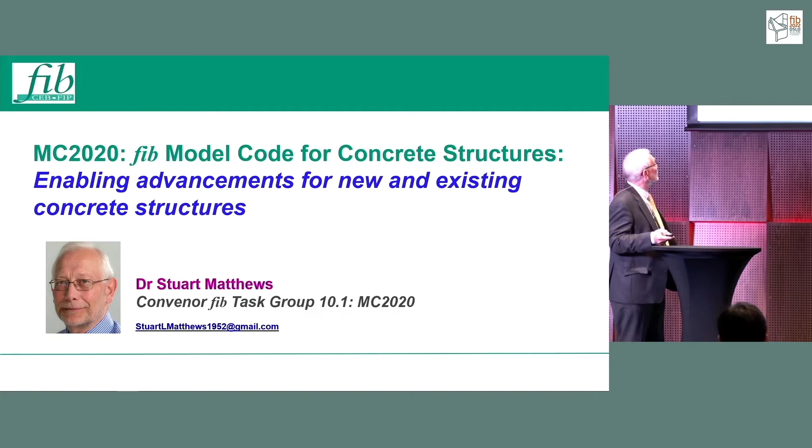That didn't work. Yeah, I'm pressing that button.

Anyway, so today's about providing an overview of some aspects, not all aspects, of the Model Code.

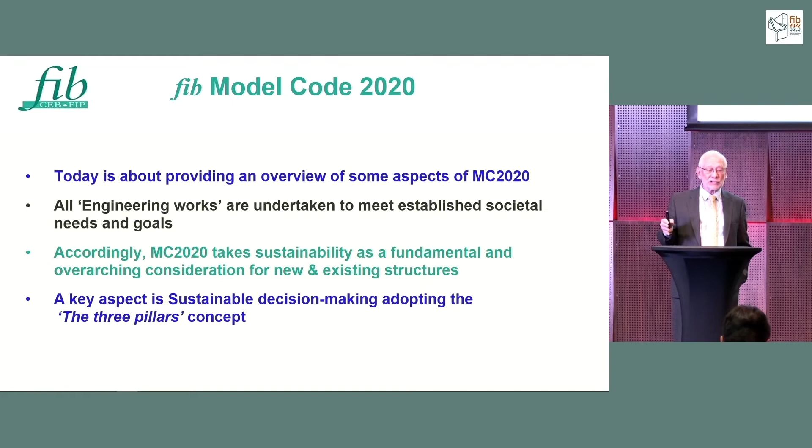Clearly, all engineering works are undertaken to establish or meet established societal needs and goals. Accordingly, Model Code 2020 takes sustainability as a fundamental and overarching consideration for the design of new structures and the management of existing ones.

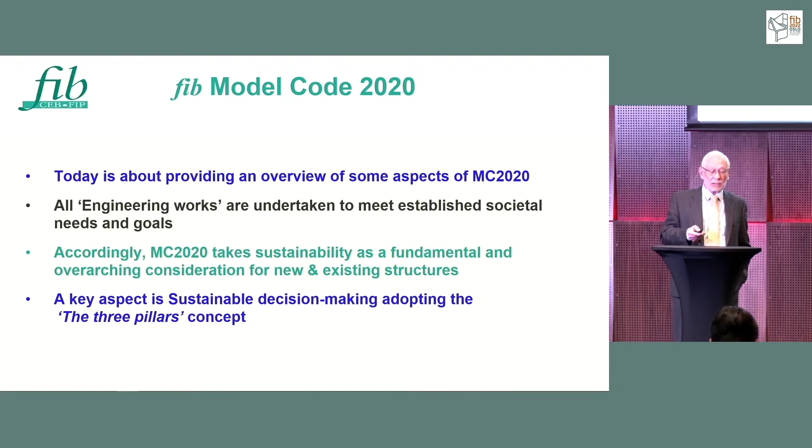So a key aspect of the framing of the code relates to sustainable decision-making based upon the three-pillar concept: social, economic, and environmental. And the integration of these approaches to design, execution, and life cycle management.

You have to press twice all the time, I think.

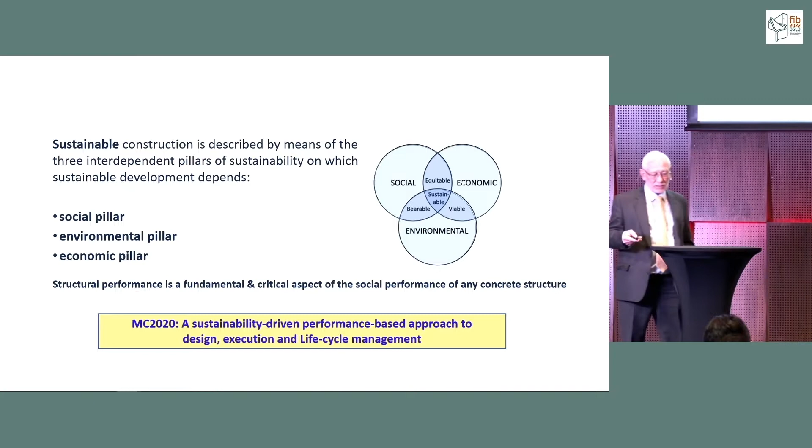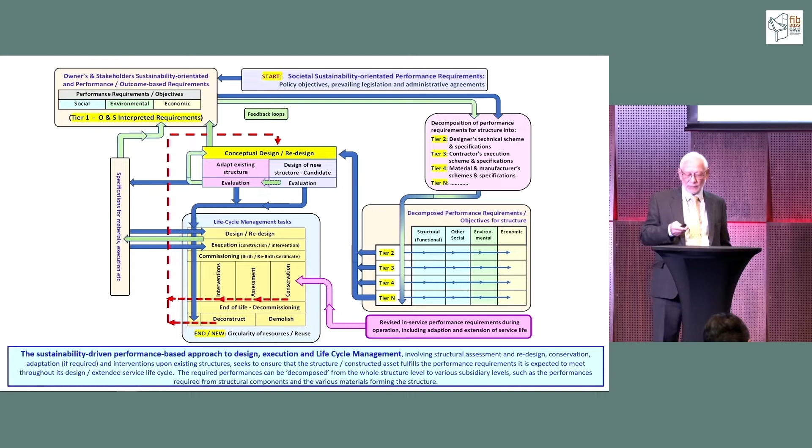Anyway, so to try and bring the complexity of the process described in the text of the code, we've sought to represent this in a flow chart. So if we start up here.

Top right, the initial considerations relate to societal sustainability, and they link into owners' and stakeholders' sustainability, performance and outcome-based requirements taken under social, environmental, and economic heads. So we call this, in a performance-based situation, the tier one owners' and stakeholders' interpreted requirements.

And then these feed through to this box over here. So the blue lines are the main flow, and the green lines seek to represent feedback loops.

So then these requirements are decomposed into the relevant parts of the organizations and bodies in the supply chain. In this example, it's designers and people who create the technical scheme and specifications, contractor, materials manufacturers, and there may well be more tiers.

And this slide here, underneath that one, just expands and shows these concepts in more detail about the way they're decomposed and then brought forward into the conceptual design process. Akio, in his presentation, showed the same sort of process.

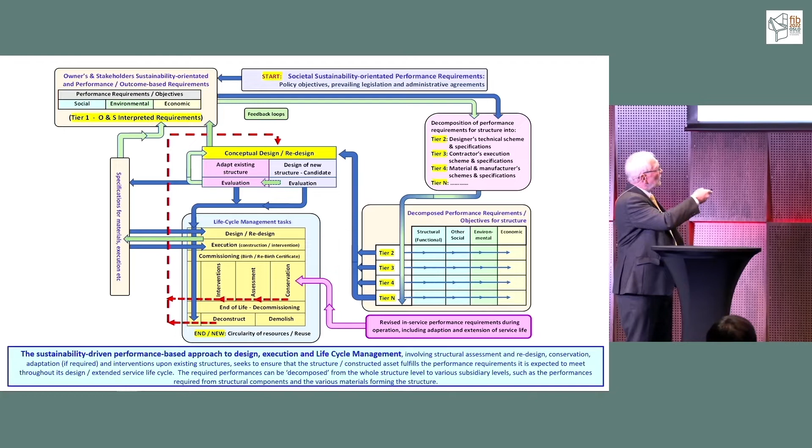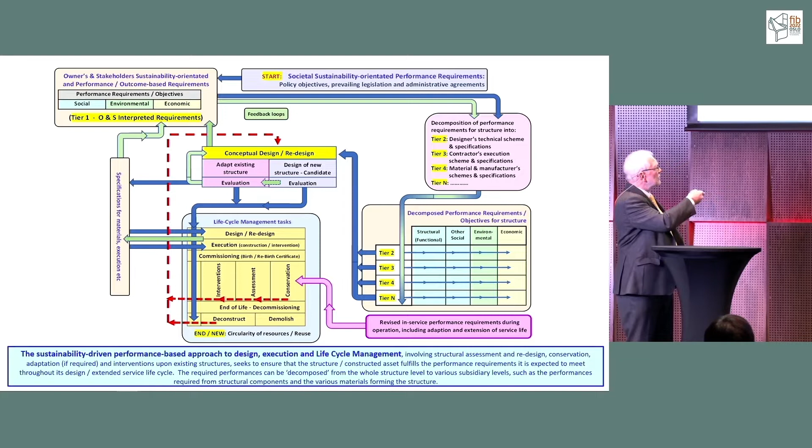And then we drop down into this life cycle management activity, which involves design and redesign, execution, commissioning. That then leads into conservation of the structures, assessment as required, and interventions as necessary. But of course, that eventually drops down to end of life, maybe decommissioning, which might be deconstruction and reuse or demolition. But this is the end of one cycle and perhaps the beginning of another with the circularity of resources.

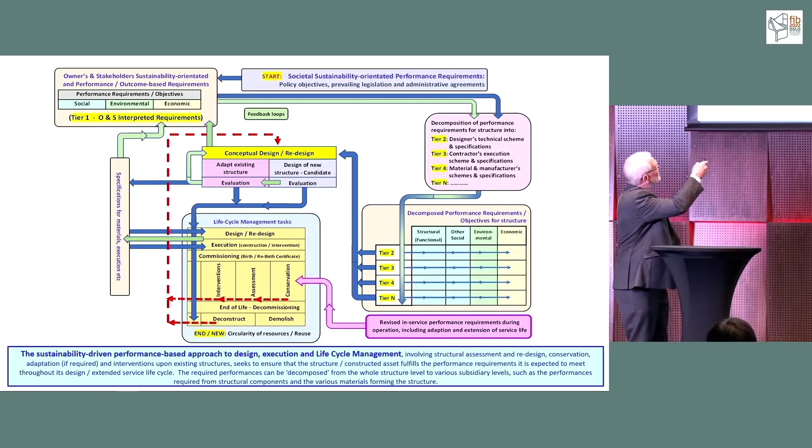But there's also aspects related to the specification of materials and execution processes and so on. The idea is that these evolve in an iterative manner to check back and verify that the performance requirements have been met through an appropriate verification process.

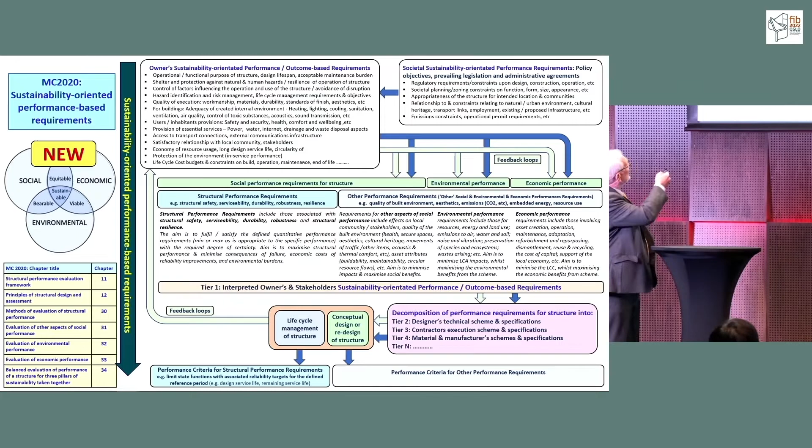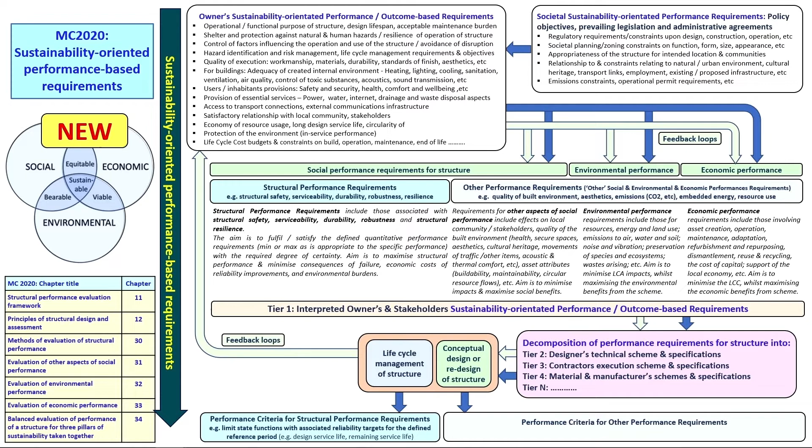So drawing this out into a bit more detail and quoting some of the text, this represents the first part of the process where we've got the definition of performance-based requirements. This sort of indicates a number of the chapters which it interacts with, which we deal with. But I'll not dwell on this because Agnieszka will explain this in a later presentation.

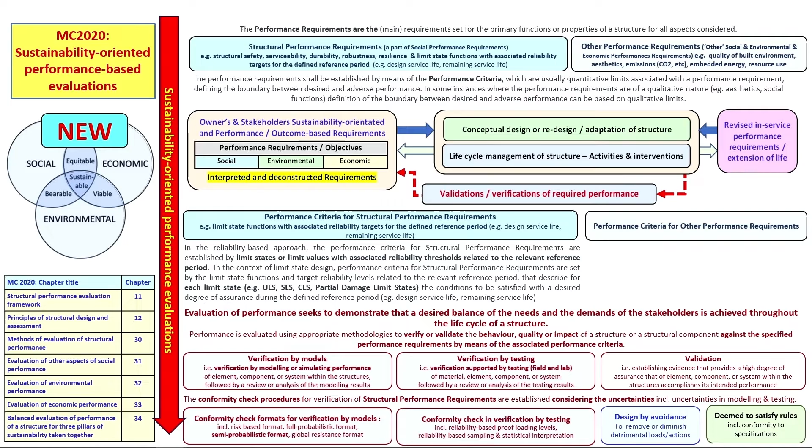Of course, we started with Model Code 2010, which was 5 parts, 10 chapters, and about 400 pages.

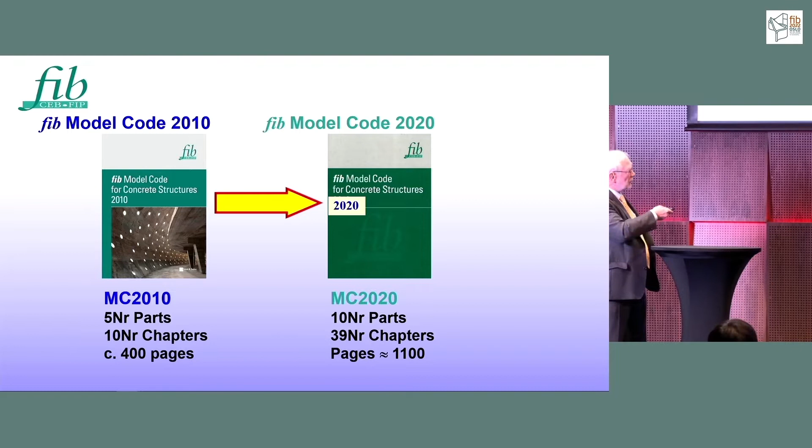Because of the increasing complexity of the situation that we find with Model Code 2020, which is dealing with new build, as was Model Code 2010, but it's expanded to existing structures because it's dealing with the entire through-life management of structures. And of course, we also need to take into account... oh, what's happened here?

Hello at the back? Is it me? Thanks. And of course, there's a lot of... is this it? Sorry, I see what I'm doing. Too many buttons.

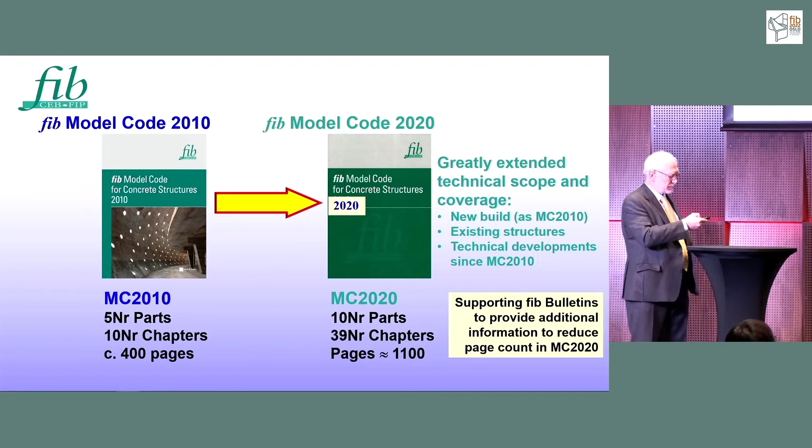So we've also got to take into account the technical developments which have occurred since Model Code 2010 was published. That's resulted in 10 parts, 39 chapters, and the current draft's about 1,100 pages. To reduce the page count and provide supporting information, there are additional supporting bulletins being developed as the work proceeds.

But let me just say a little bit about the actual table of contents and structure of the code. So part 1, up the top here, chapters 1 and 2, terminology. Part 2 is basic principles, relating to sustainability, the performance-based approach, principles of life cycle management, principles of design, assessment, execution, conservation, circularity and dismantlement, and quality and information management. So that's laying out all the basic principles applied in the code.

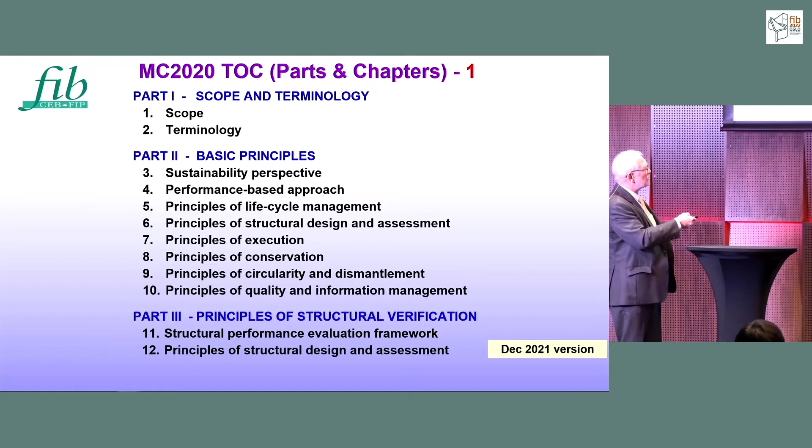And then part 3 starts with the principles of structural verification in terms of structural performance and the principles of structural design and assessment. Then moving on to part 4, this is a new section in the code. It deals with actions on structures.

Then part 5, similar to Model Code 2010, input data for materials. So we've got a range of concretes, reinforcing steels, pre-stressing steels and systems, non-metallic reinforcement, fibre reinforcement, UHPC, and of course, with existing structures, you need protective materials and systems.

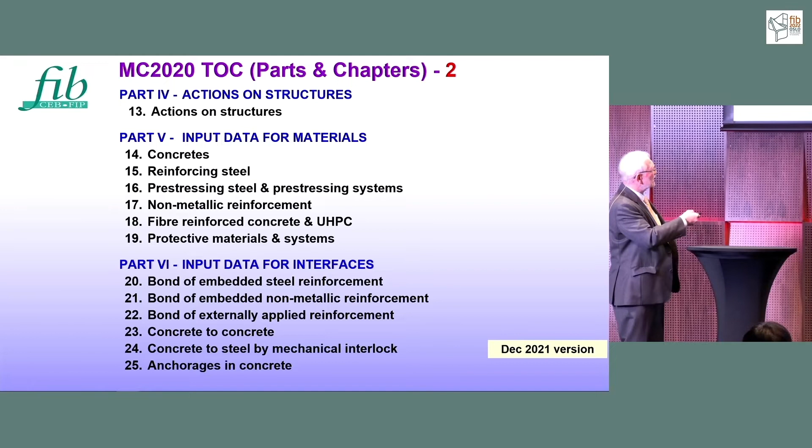And then part 6, input data for interfaces, so more materials, more interfaces. Chapters 20 to 25 deal with embedded steel, embedded non-metallic reinforcement, externally applied reinforcement, concrete to new concrete to old concrete, and then concrete to steel by mechanical interlock, so structural sections, and then anchorages in concrete.

Moving on, part 7 deals with design and assessment. So this is the main technical content of the code, chapters 26 to 34.

So you can see here, we've got the conceptual approach to design and assessment, then the approach to design, approach to assessment, and then structural analysis. The really major content of the code in terms of technical information is this section here, chapter 30 on structural performance verification.

And then evaluation of other aspects of social performance, environmental quality, economic efficiency, and then trying to bring all this together in terms of making a sustainable decision about the candidate solutions for your scheme or intervention upon the structure. And then part 8, execution, so management of that, and consideration of construction works and execution of interventions.

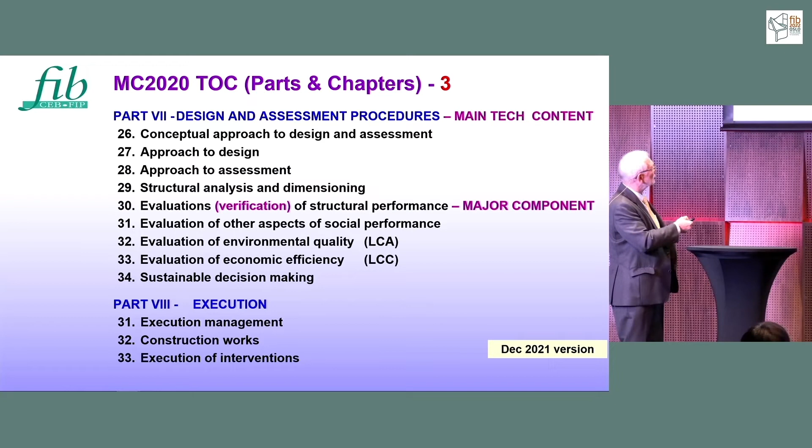And then finally, we have part 9, which is conservation, i.e. life cycle management in Model Code 2020 speak. And part 10 deals with circularity and dismantlement.

And there's, as I say, an associated program of supporting bulletins, which are importantly being developed at the same time as the code.

Okay. There we go, three presses that time.

So this makes a comparison between Model Code 2020 and Model Code 2010. And as I said, the main technical content is in this section here.

So this is a page count for the technical content in both, and the percentage contribution to the total document. So you can see really the big growth in the length of the document comes in these sections just because of the sheer volume of new information.

And then the technical content summarized here, and you need a front end and a back end, so a few pages. But this isn't quite a fair comparison because this is a professionally edited hardback copy.

So I think when we sent them the text as a Word file, this was probably about 550 pages, so that they edited it down. So it's about double the length as the Model Code 2010.

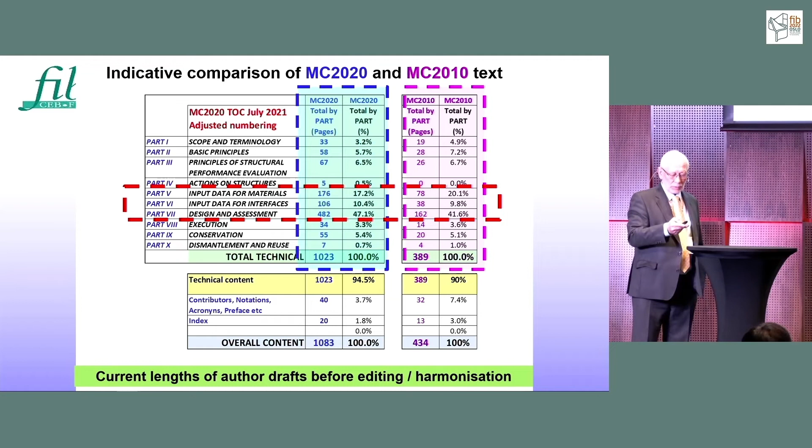How are we doing for time?

So I've classed this as an aspirational program. We've done those parts. So output 1, as we've termed it, that's a full version of the author drafts.

They've been compiled and partly harmonized and distributed for comments. And we've had the comments back from that, which will enable us to derive a second complete version. But essentially, the difference is that it should be, or we're aiming for it to be, largely harmonized.

So again, output 2, it's digital, will be available to task group 10.1 and other parties. And then in the winter, at the end of this year and early next year, we will hopefully have received the comments on that document, and we'll prepare the next edition, which will be called the pre-publication draft.

Again, we're envisaging that to be digital, and then that will lead us to a final draft, which will be presented for voting by the General Assembly in summer of next year, we hope.

And that then leads us to the final goal, the publication, which I understand we will be passing on to the printer, to the publisher. And it's, oh dear.

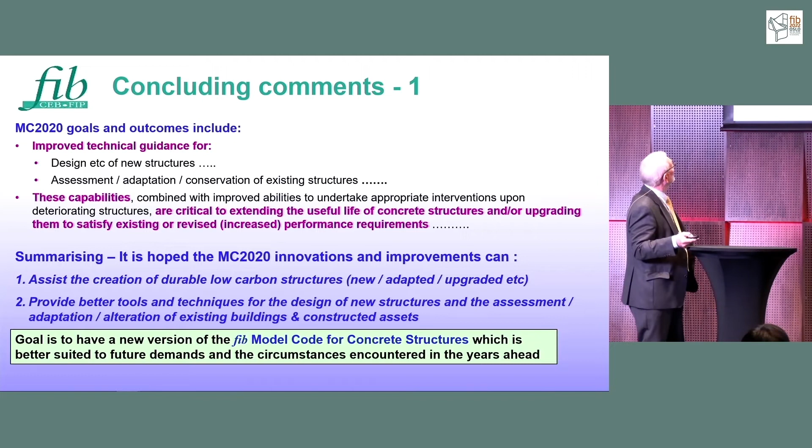Then the concluding comments. Model Code 2020. What's going on?

So it's providing improved technical guidance for the design of new structures and the assessment, adaptation, conservation of existing structures. So these capabilities, combined with the improved ability to undertake appropriate interventions upon deteriorated structures, are critical to extending the useful life of concrete structures and upgrading them to satisfy existing or revised increased performance requirements, but hopefully at a low carbon footprint level.

So summarising, it's hoped that the Model Code 2020 innovations and improvements can assist with the creation of durable low carbon concrete structures and provide better tools and techniques for the design of new structures and the assessment and adaptation of existing ones.

And clearly their goal is to have a new version of the Model Code which is better suited to the future demands and circumstances to be encountered in the challenging years ahead as we try and move towards net zero. So I'll stop there. Thank you, Stuart.

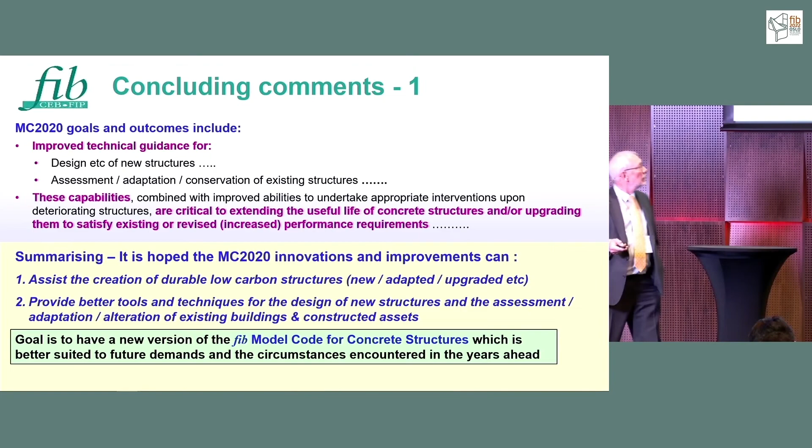I hope this gave you the sneak preview of the content, overall content of the model code, and I suppose that there will be some questions. We, in the meantime, have a microphone, so if somebody wants to ask Stuart anything based on his presentation, please do so.

They're all, yes, no, please. They're not all happy. You don't necessarily get the same information on that screen as you do in this one. It gets confused. Thanks a lot for the presentation.

It is clear that repair and retrofit is an important issue for existing buildings. Do we have some new technology, low carbon emission repair materials? Because we have a lot of existing structures. Secondly, do we have some modeling approaches, analysis approaches for substandard structures which are repaired with this kind of new, well, low carbon materials?

We're not prescribing any particular material. We're just seeking to put in place ways in which you may be able to use materials coming on. So we're trying to make sure that the code is not a barrier to change by seeking to adopt performance-based approaches. And there are some lectures coming up.

Lecture 7 and lecture 11, or paper 11, talk about evaluation and assessment of existing structures. And paper 14 deals with conservation and intervention. So hopefully we'll provide a bit more information as we go through the day. But if not, come and see me and we'll see if we can provide you any additional information.

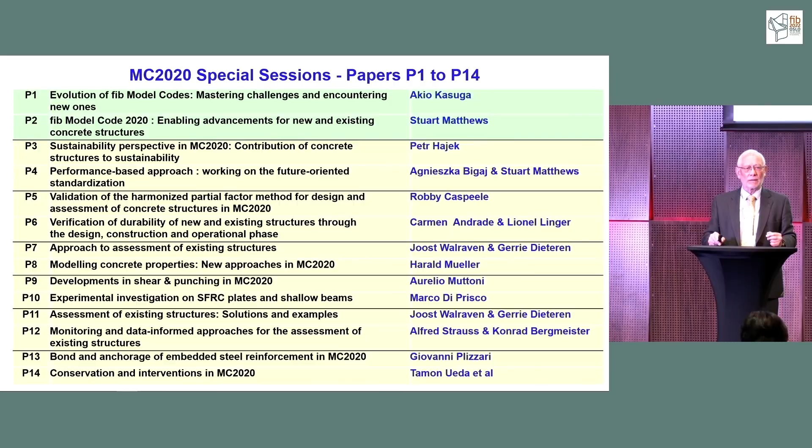Okay, thanks a lot. If next questions are, how are we there for time? Then thank you, Stuart.